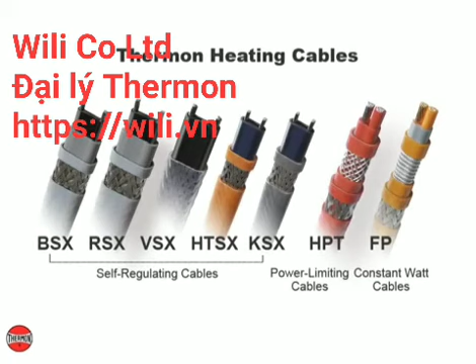This video covers installation procedures for Thermon's Terminator ECM, wall-mounted electronic control module for Thermon's self-regulating, power-limiting and constant watt trace heaters. This kit covers 1 and 2 trace heating applications.

Receiving, storing, and handling. Inspect materials for damage incurred during shipping. Report any damages to the carrier for settlement. Identify parts against the packing list to ensure the proper type and quantity have been received. And, store in a dry location.

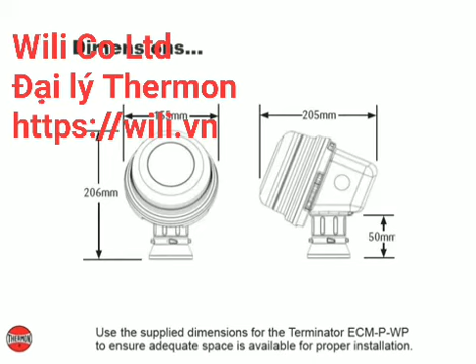Use the supplied dimensions for the Terminator ECM wall-mounted kit to ensure adequate space is available for proper installation. The following kit is required for power and end terminations. 1 kit is needed per heater and must be ordered separately. Refer to Form PN50136U.

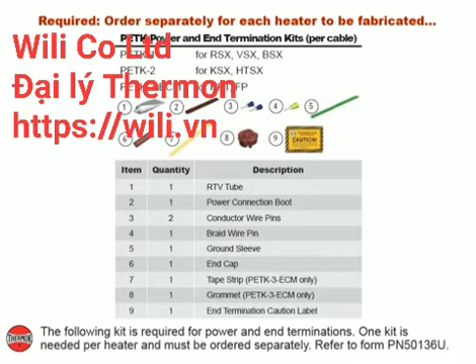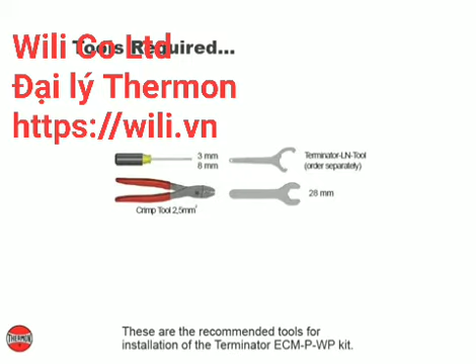These are the recommended tools for installation of the Terminator ECM wall-mounted kit. Individuals installing these products are responsible for complying with all applicable safety and health guidelines. Proper personal protective equipment, or PPE, should be utilized during installation. Contact Thermon if you have any additional questions.

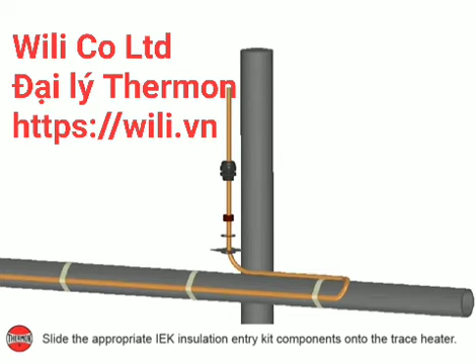Slide the appropriate IEK insulation entry kit components onto the trace heater. Secure the wall mount bracket to the mounting surface using banding for pipe-mounted applications and screws, flat washers and nuts for wall-mounted applications. Mount the expediter to the bracket using M5 by 8 mm screws and M5 lock washers.

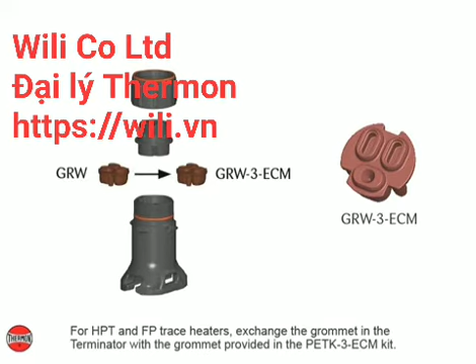For HPT and FP trace heaters, exchange the grommet in the Terminator with the grommet provided in the PETK-3-ECM kit. Position the RTD sensor or sensors in the grommet. Do not pull from the sensor end when routing through the expediter assembly. Pull the sensor from the lead wire portion.

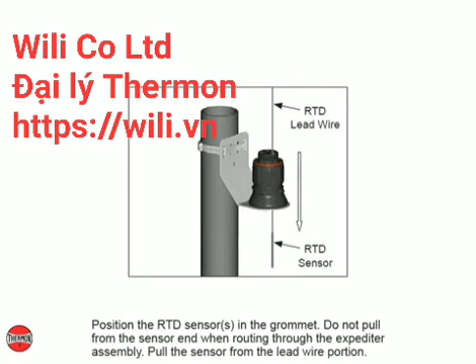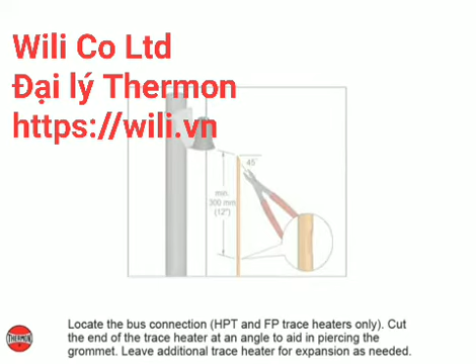Locate the bus connection, located on HPT and FP trace heaters only. Cut the end of the trace heater at an angle to aid in piercing the grommet. Leave additional trace heater for expansion as needed. Insert the trace heater into the expediter. Make sure the bus connection, located on HPT and FP trace heaters only, remains outside of the expediter to establish a cold lead.

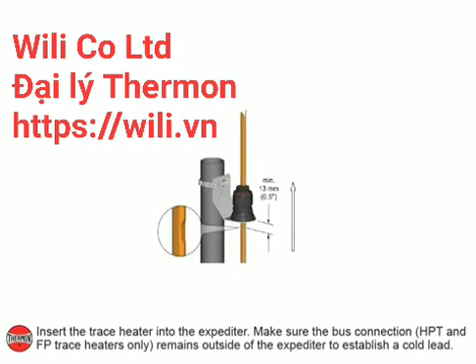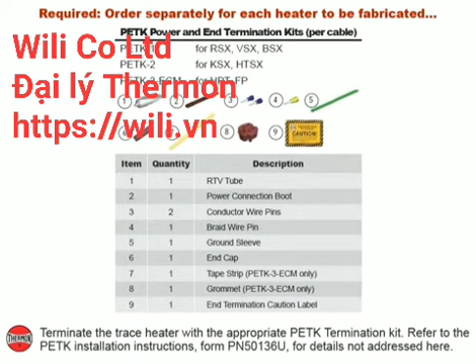Terminate the trace heater with the appropriate PETK termination kit. Refer to the PETK installation instructions, Form PN50136U, for details not addressed here. Push excess trace heater back through the expediter. Tighten the nut securely and tape the trace heater expansion loop to the pipe.

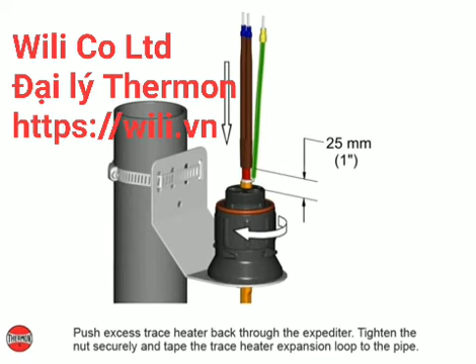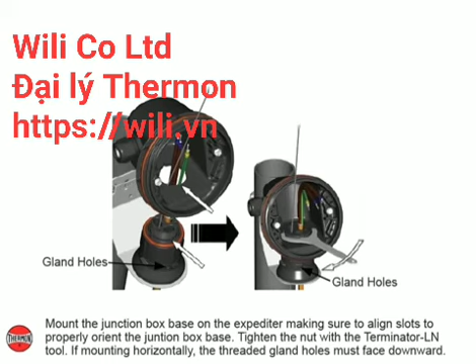Mount the junction box base on the expediter, making sure to align slots to properly orient the junction box base. Tighten the nut with the Terminator LN tool. If mounting horizontally, the threaded gland holes must face downward. Install the M25 power gland, order separately, and the M25 blind plug.

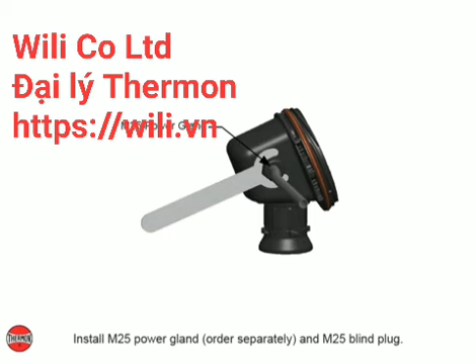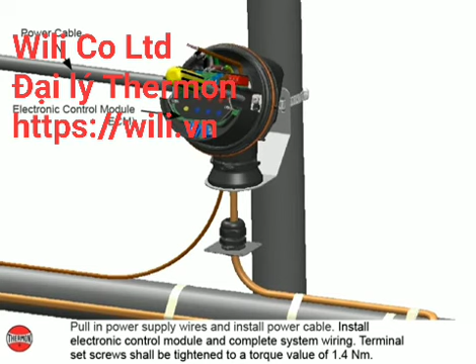Pull in power supply wires and install power cable. Install electronic control module and complete system wiring. Terminal set screws shall be tightened to a torque value of 1.4 Newton-meters. Typical wiring details for connection of 1 to 2 trace heaters.

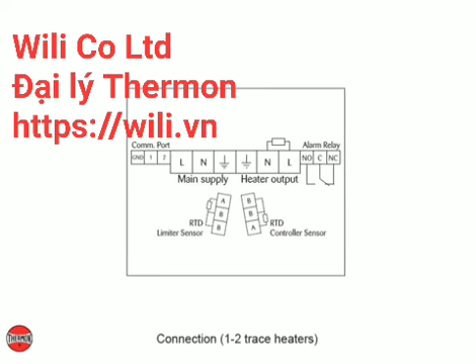Set the module's electronic control and/or control limiter at desired set points. Use the rotary switches for setting control and limit temperature, Celsius or Fahrenheit, and auto or manual reset.

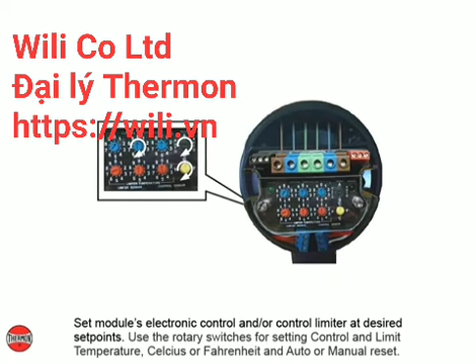Install the junction box lid and twist hand tight. Insert a screwdriver into the ratchet slots located on the side of the junction box base to tighten. The lid will rotate 30 degrees. To remove the lid, repeat the steps in opposite direction.

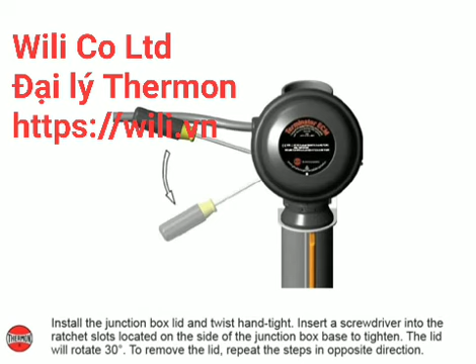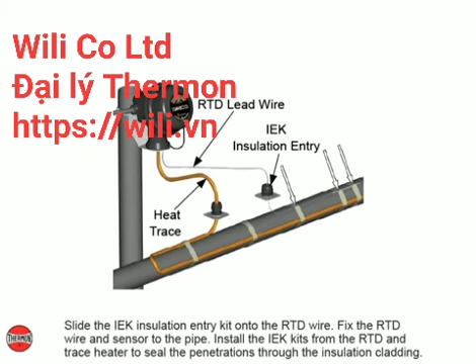Slide the IEK insulation entry kit onto the RTD wire. Fix the RTD wire and sensor to the pipe. Install the IEK kits from the RTD and trace heater to seal the penetrations through the insulation cladding.

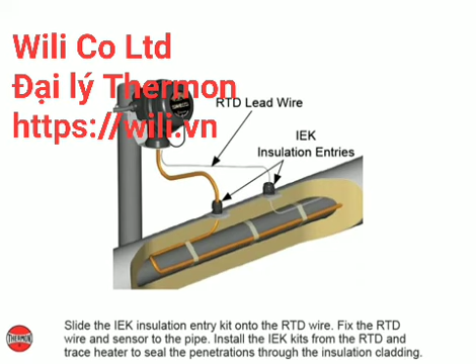Completed Thermon Terminator ECM, pipe-mounted electronic control module for Thermon self-regulating, power limiting and constant watt heating cables.